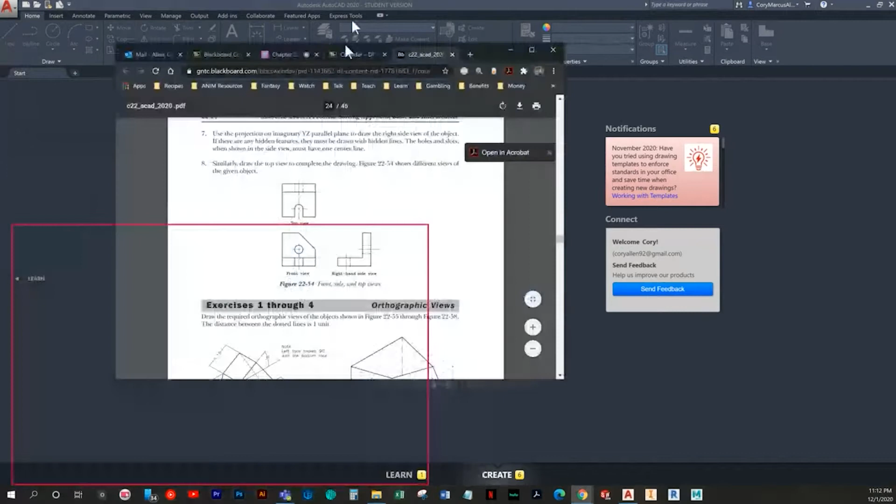We're just going to draw orthographic views for the assigned exercises, but we're going to make sure to draw them in a specific way. So when you're looking at a view such as this, you're going to have some indicated information it's not really saying.

It's easier to see on this one, but with the way this part is positioned, obviously you know that this face is going to be the top, so you're looking at it down onto that view. But what it's implying with the position it has is that this is going to be the front view, this face, so you would be looking at it from this direction. So obviously that means this would be your right side view, and you would be looking from this direction.

And that face over there from this direction is the left side view. You would look from this direction. And the same with the back and the bottom and so on.

So when you see it positioned like this, you have to make sure that you are drawing it with the intent of having it laid out the exact same way. So even though when you look at this, you would think that you would draw this face first, that's really not going to be the one that is indicative of the actual front view. That's going to be the right side view.

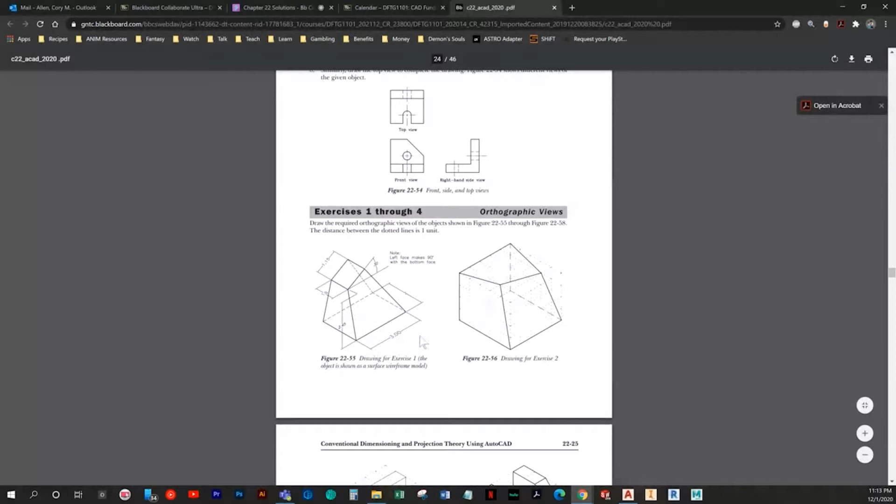So even though on this one, for instance, when we start, we'll draw this view first, it won't be our front. We'll have a right side and we'll project it over. I don't want to get too many details in there before we even get started, so we'll go ahead and jump in and get to drawing and see what we can make of it.

And it appears that they're all going to be on imperial units, so let's get started.

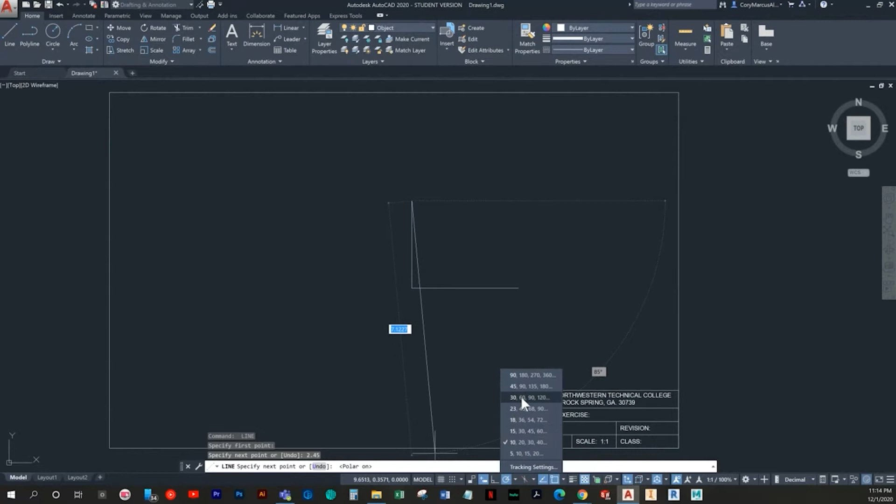Okay, so first and foremost, we'll do that right side view I mentioned, and it's 3 long and 2.45 tall, and then we're given an angle of 30, and it's a length of 1.15.

So I can go ahead and close that, and I'm going to switch back to ortho so that we can draw straight. And there's various different ways to go about producing the next view.

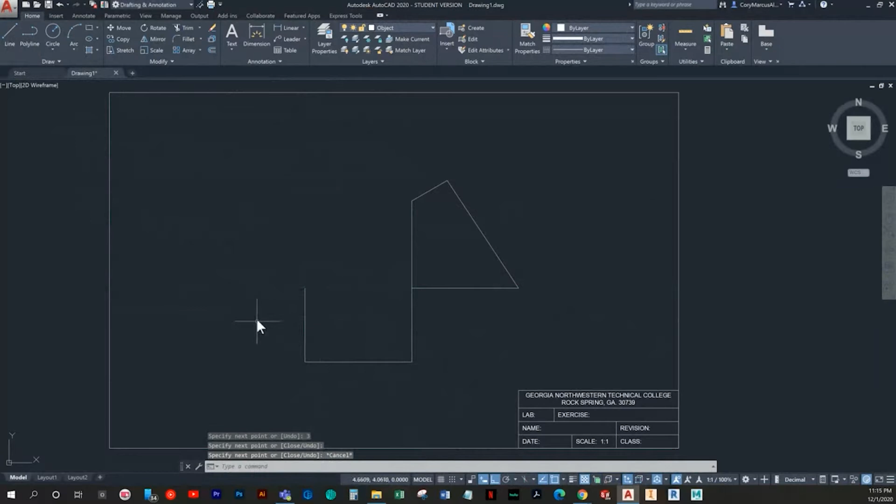A common method is to do an offset of 3, and that'd be your first edge. Another trick that I like to do is I'll draw just down some random number, do 3, and then draw back up and find exactly where the end is. So then I can draw whatever, and I can easily delete this portion out. That's what I'm actually going to do in this case.

And it doesn't specify how many views we need, so we'll just do front and right and see if I feel like we really need anything else. So the bottom is 2 wide, and then we've got these lines here.

And I'm going to draw a center line because our top is actually only going to be 1 wide. So I'll offset both directions.

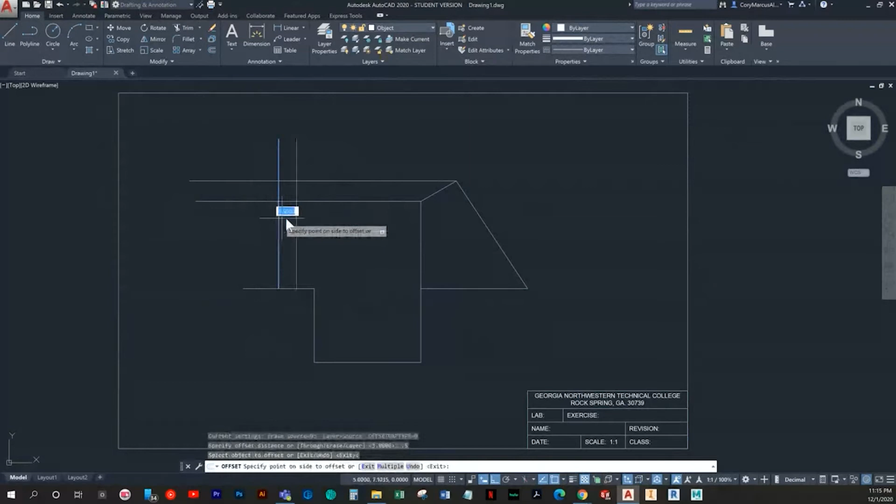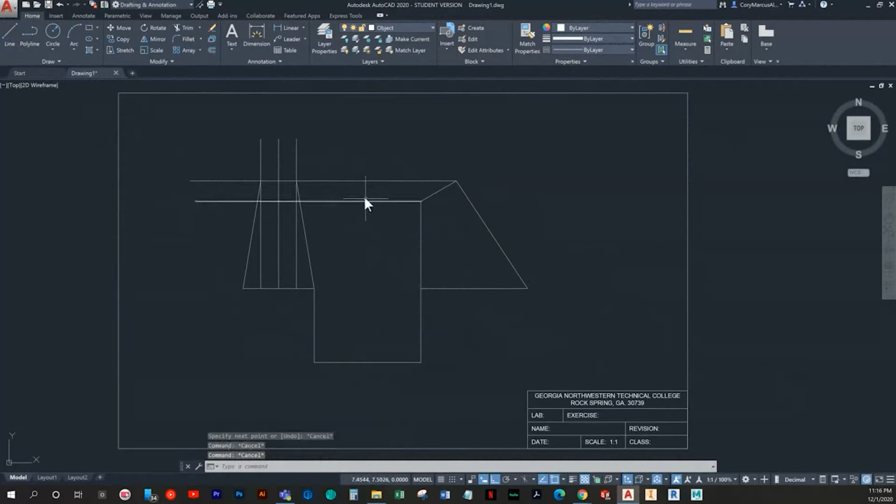And then we've got, and this may be hard to visualize, so I'll break it down. So like this edge here, we're going to draw first. I'll connect this edge piece that corresponds with here to the one that corresponds with here. And I'll do the same for this side. And just so it gets a little less convoluted, we're going to delete out some of the extra stuff now.

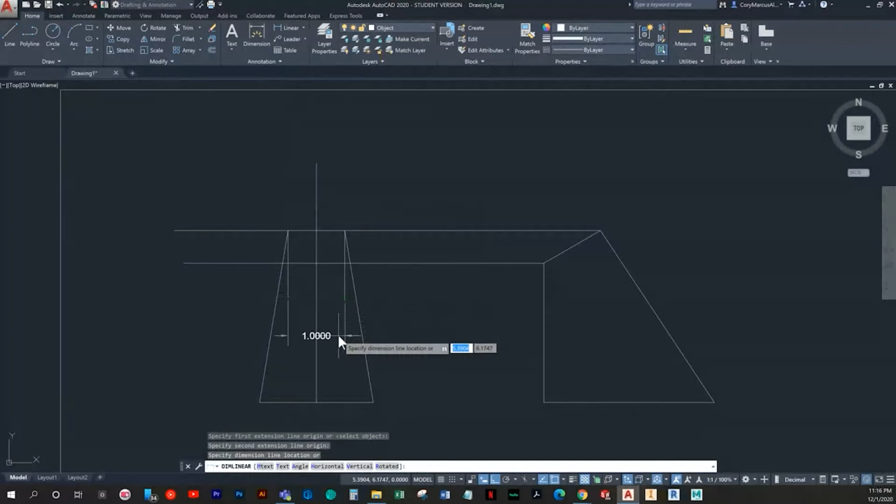And then we're going to draw our line straight down here, because obviously, it's going to be 1.0 all the way across. It's a perfect square or rectangle in this case.

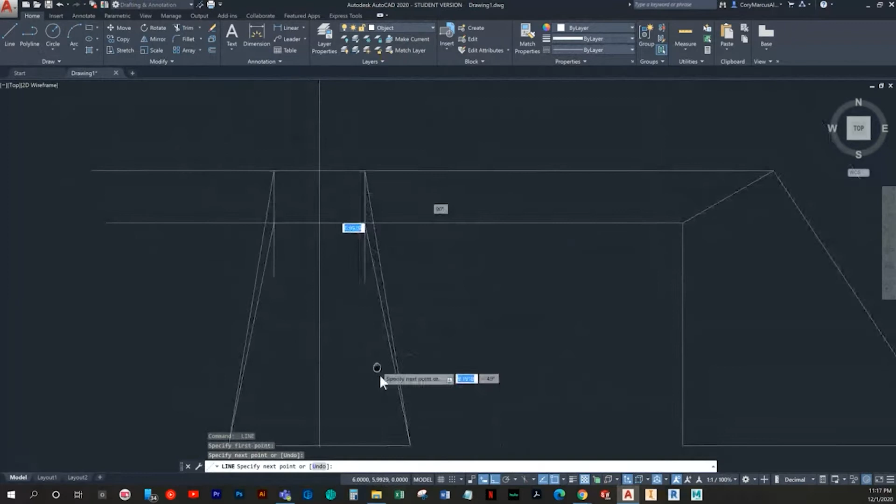So then we can draw our other lines, which would be this edge here connecting to the intersection. And it's always a good practice to zoom in and make sure that you've landed the right connection, of course.

And it may seem small here for this rectangle, but that's actually correct because obviously, as you can see, it's only that far over. So I'm just going to trim out the little extras here.

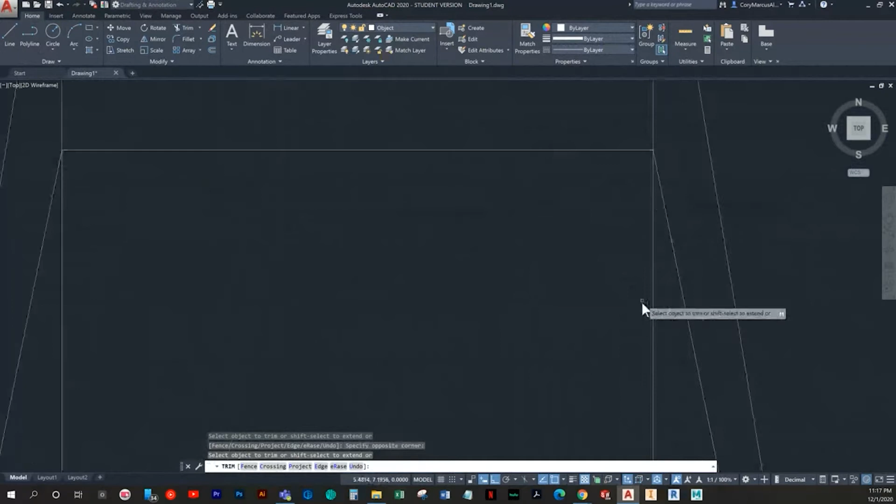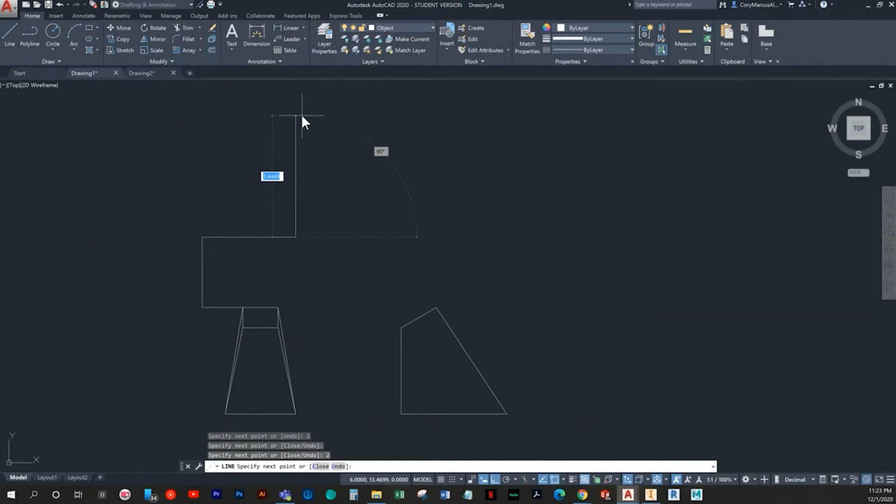You know what? Let's go ahead and do a front view, or top view actually. So in the same vein, we're going to start from here. I'll just draw randomly out, then up 2, and then back over to where that intersects at this given point. And then I'm going to draw up, which this is going to be the width of 3.

Okay, so now I can delete off this little projection portion. And I drew that from the wrong edge. Okay, so now we've got our full boundary of the top view.

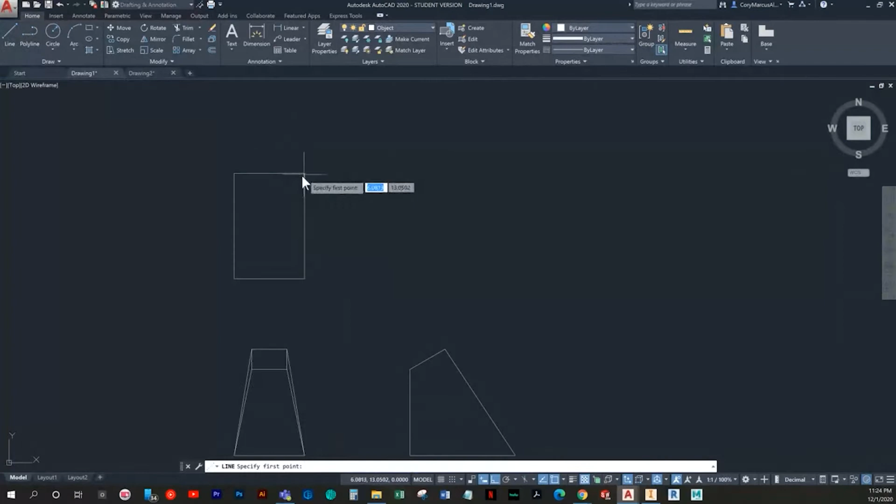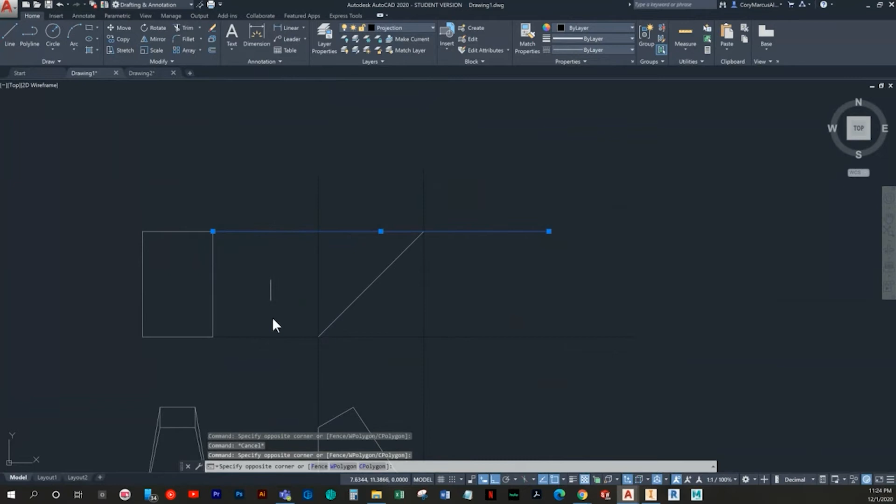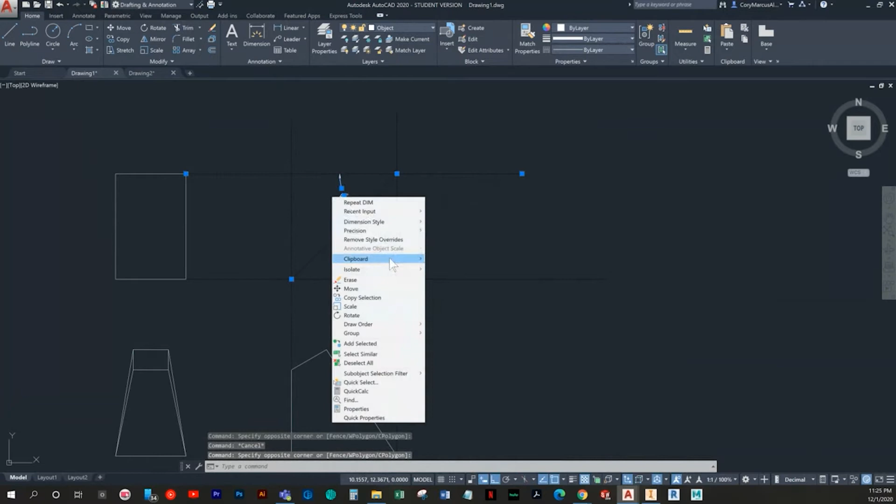Okay, so now is a great time to do a miter line. In order to be able to project some of this information from this other view, it's often easier to do a miter line. So basically what you do is you draw an object that goes from the furthest extent of the part, like this is the absolute furthest distance on this end, and same here. And obviously because this part corresponds, this width matches this width, you end up having this perfect square, and then you can draw a line in that square, which is called the miter line. And if you were to go and measure it, you're going to get a perfect 45 degrees. I mean, even if you change the precision to maximum, it's 45.

So the perk of this is you can actually translate data across that axis, if you will. It's just a point of reflection. So what I can do is draw this edge here, and it locates it in that view. So I'm going to then go ahead and draw in what is the rest of that rectangle using the other view.

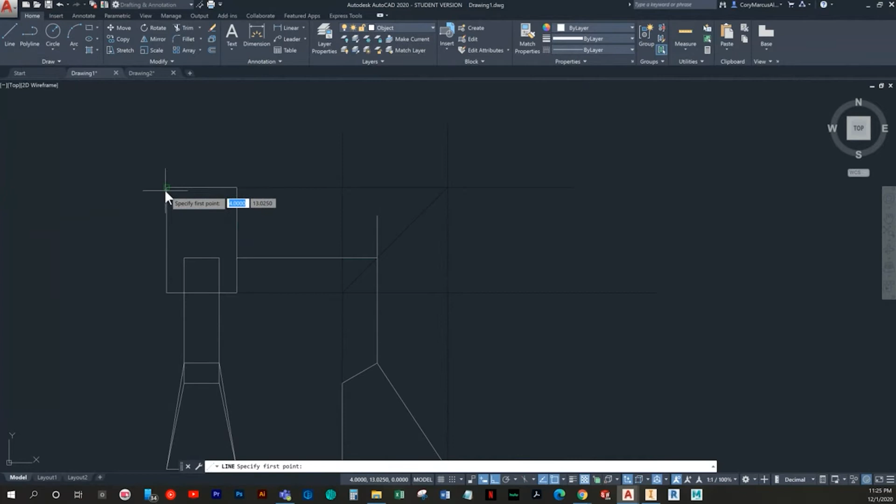And then all we have to do is connect our edges. So we know that this vertex touches this one over here. So I can basically use some reasoning to match up what's left. And then I just need to trim away the excess, and I can delete all this other stuff. And just like that, we made a pretty quick other view. So that's going to be it for this one.

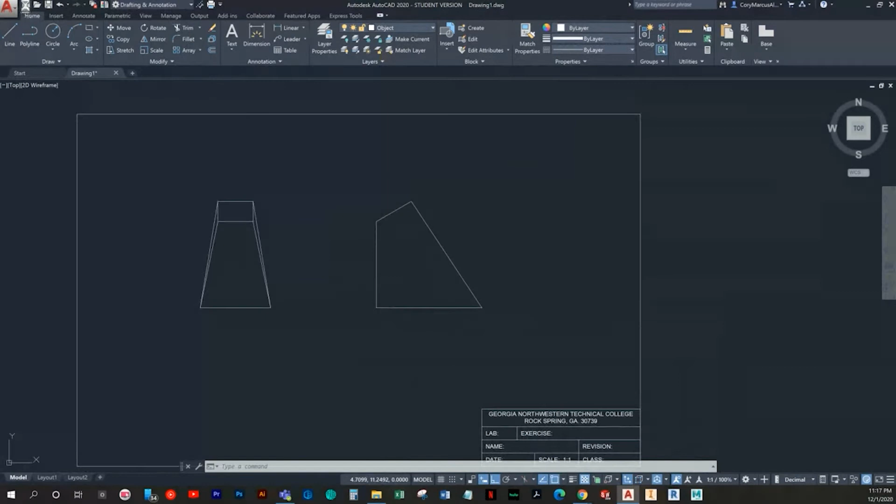So we'll go ahead and jump into exercise 2.

Now this one we are going to draw our front view first. And it actually gives our units as 1, so I'm going to turn the grid back on. That's pretty cool. Okay, so it's 5 long on the bottom, and then 4 tall. And this is where it gets kind of goofy and it's hard to tell, but basically when you're looking at this one, it stays within those cube boundaries.

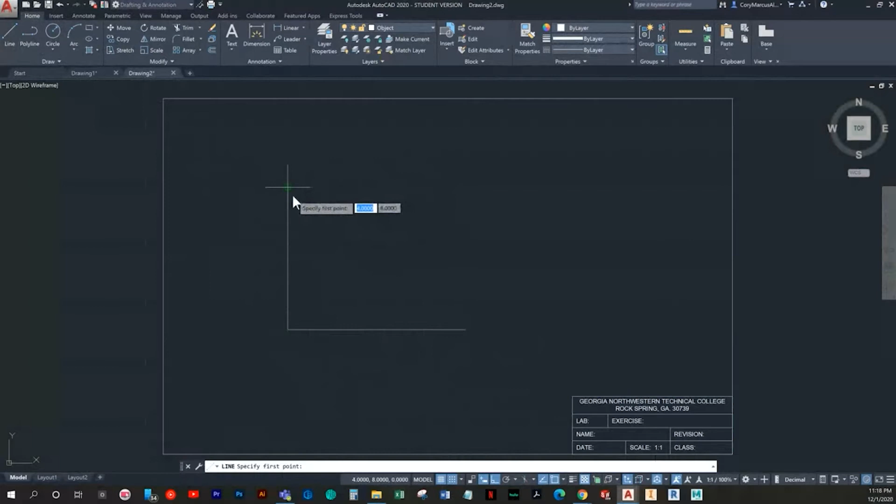So if it's always on a dotted line. So if it looks like when you're looking at this view that it's actually like randomly up here, it's not. It's just further deep into the actual object. It's still on this edge here, but it's only 1, 2, 3, 4 far. And then it just connects down here, and that's our front face. But obviously there's another face in the back that you have to do as well.

And it's the same on this edge in the back, so we don't have to worry about that part of the back face, but we do have to draw the other face. Okay, so it starts here as well, and then it is also this top face, but it is only, let's see, 1, 2, 3.

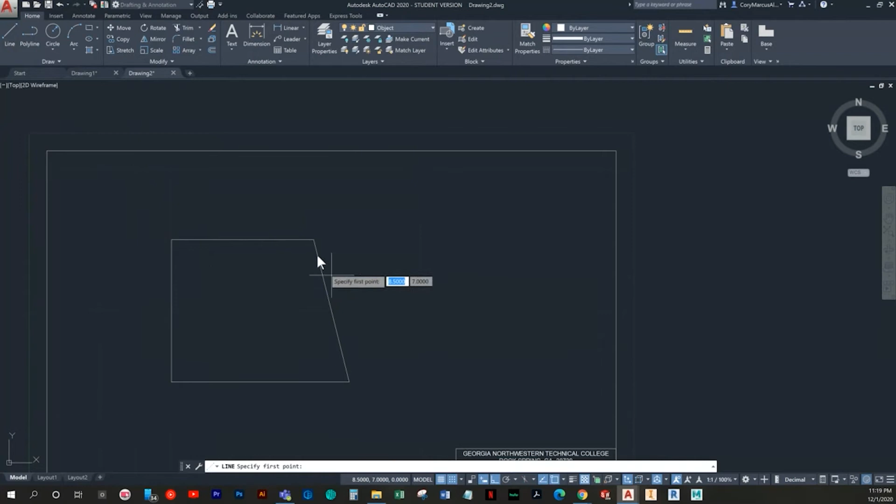Actually, it's kind of hard to tell. Let me look a little closer here. Ah, I drew the wrong one first, I think, actually. 1, 2, 3. Yeah, okay. My bad. So the front face actually was 3 over earlier.

Let me turn off my snap for a minute so that it doesn't keep snapping to it. Yeah, so looking back at that first one, it was 3 units over, and I miscounted. So this is the rear edge that you're actually seeing behind it.

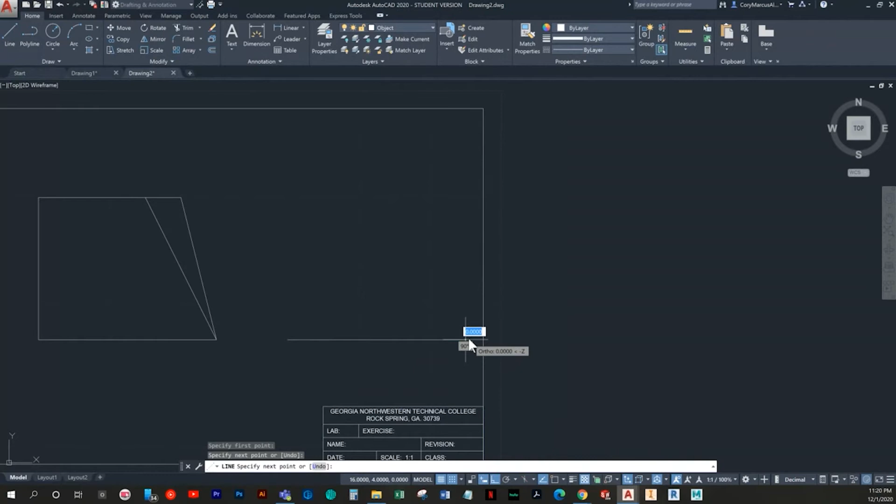So then we can go ahead and jump over to our side view. And we'll start 2 over from it. And it's 5 wide. And naturally it's the same height as the other one by default. So I'm just going to go ahead and draw that in. So then from there, we know that the front face earlier was from this point, and it connected down here.

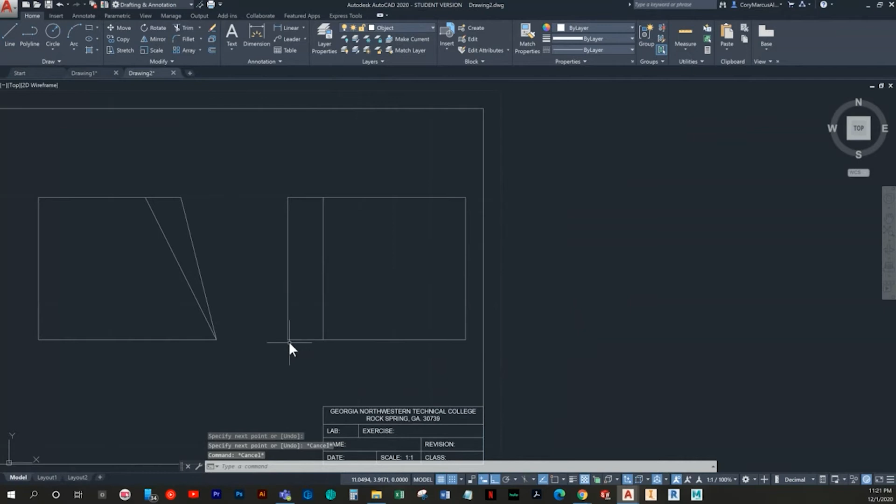I don't know why I drew it there. It was down here. So it's actually the same on the back end as well. I see the problem, I had ortho on. So, ironically, it ends up looking pretty basic.

Okay, let's go ahead and do a top view on this one. This one's going to be pretty complicated, so I feel like it really does help. We'll probably just do top views on each of these as well. I think first I'm going to move this down a little bit so we can have a nice grid to work with.

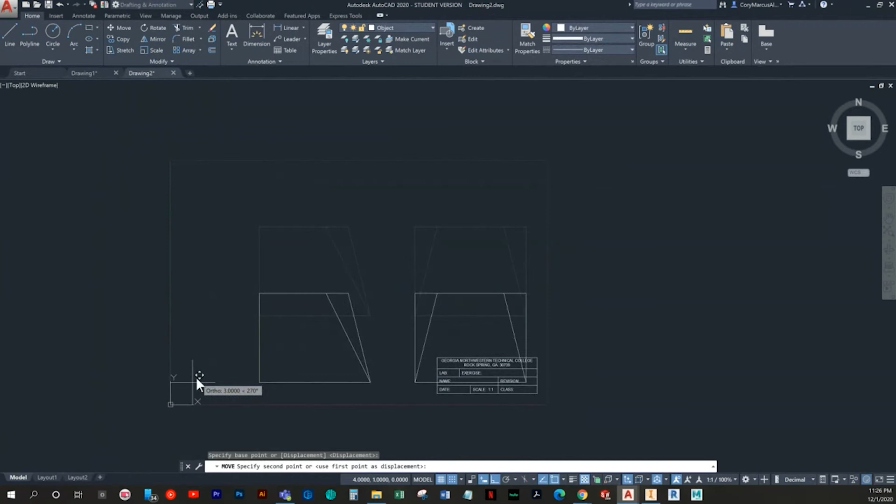And for the sake of cleaning all of this out to have more room, I will draw here. Okay, so it's 5 tall and 5 wide. So once we have this box, I'll go ahead and start to trim away at it.

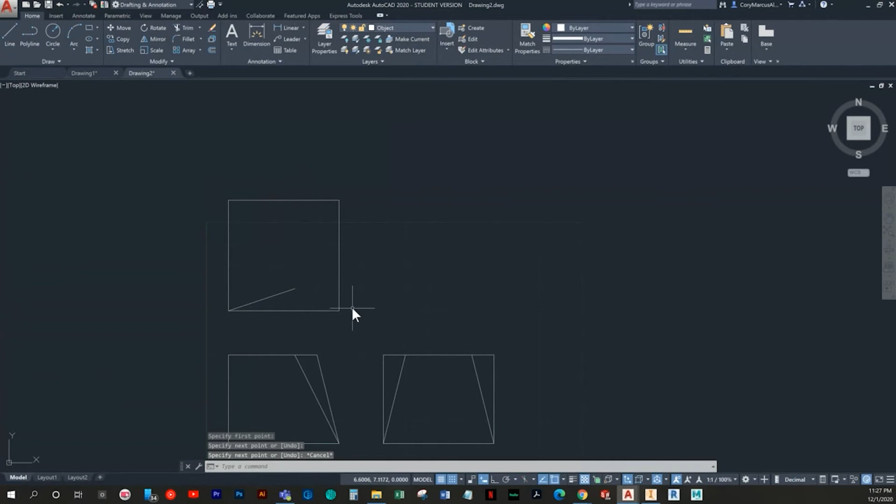But obviously on our top view, it does have a bottom face that is a perfect rectangle. So we have our first line, which was the top edge in our front view, and it comes over 3, and it goes back 1. Then this edge here went from here to that same edge, and then this back edge was over 4 and down 1.

So they were pretty much just connecting the dots to make it look right, but in a nutshell, you end up with that profile like this. And yeah, that's your top view. It's actually all that you have to do on that one. It's more straightforward than it seems.

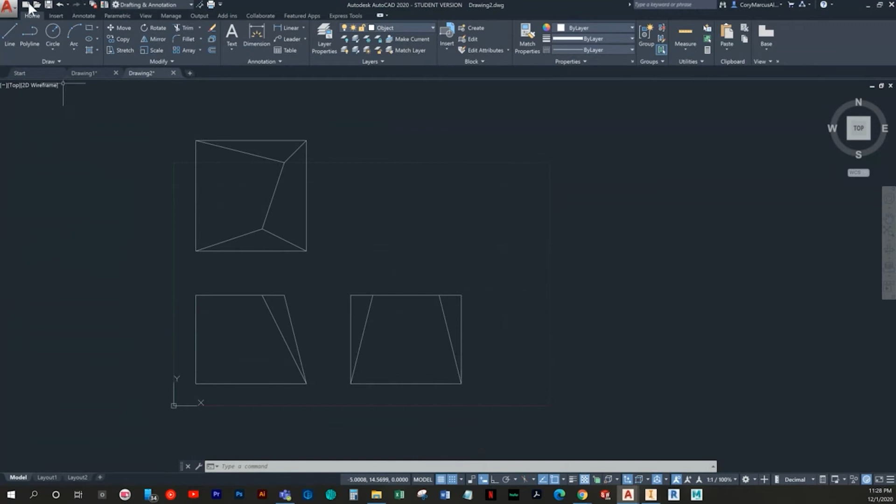So next we'll do exercise 3. And I'm going to start it a little further down. I think this guy's pretty big too. Okay, so it's 2 over, 1 up.

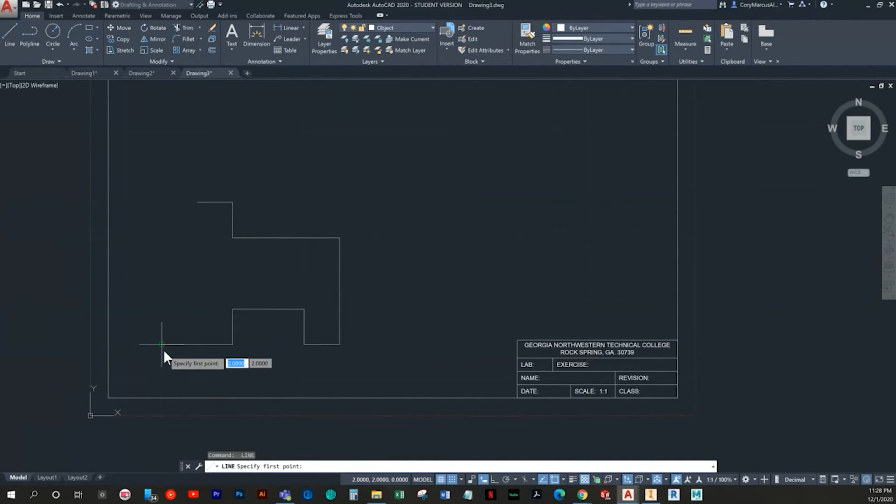Oh, I wasn't paying attention. 1 up, 2 over, 1 down, 1 over, up 3, over 3, up 1, over 1, and then I'm going to stop there. I'll go up my 2 and then connect the dot.

Okay, so I'm going to leave out this part. Well, I'll go ahead and draw it and we'll talk about it. But basically, there's going to be a hidden line here as well. The reason being is because there's that gap which comes in 1 down, and you'll be able to see that edge in this view.

And we could have projected it, but just for the sake of getting this done, I suppose we won't bother with it for now.

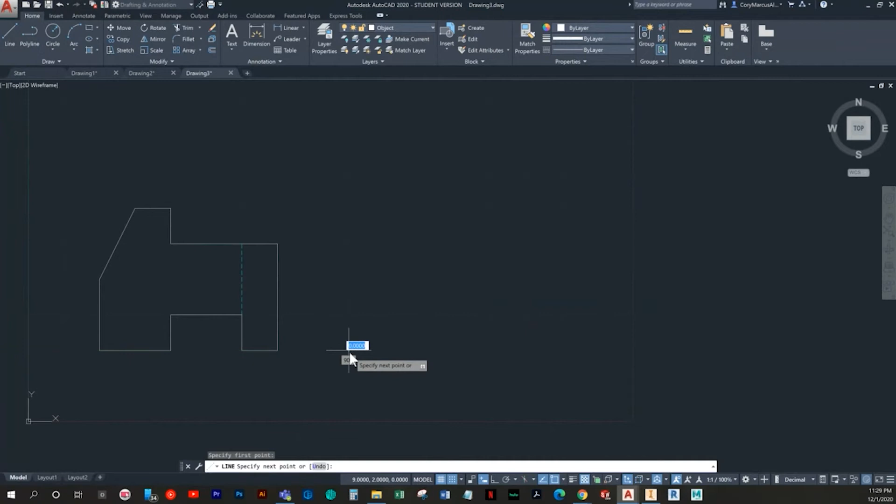Alright, so now we'll do the other view, the right side view, and it's going to be 5 wide. And let's see, that first portion is going to be 3 tall, but really there's actually a 4th, so let's extend that.

We'll have an edge at the 3 mark. Wouldn't you know, snap gets in the way sometimes. Okay, so we'll have a shape roughly like this. But then there's some information that we'll have to add in.

So like we've got that little cutout I was talking about earlier. It's going to run up to the end of that 3 height. And then we've also got this, which you could project over, but in this case, we can just draw a horizontal line and know it's there.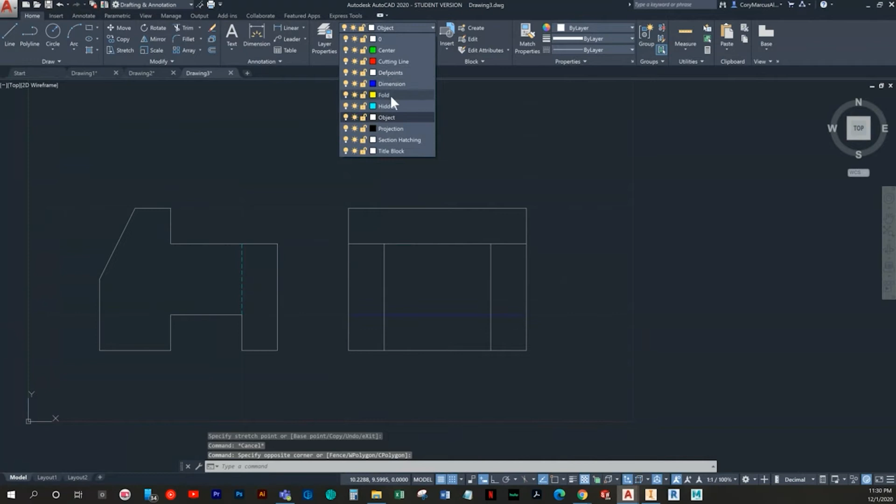Okay, so what we have is our cut through on the bottom, and we have this little section here. You may wonder why is it that you have this edge that goes throughout? It's because you've got the edge for the cutout, but you also do have that edge on the back where this vertex is, so you would still see it. And that's pretty much going to be it for that view.

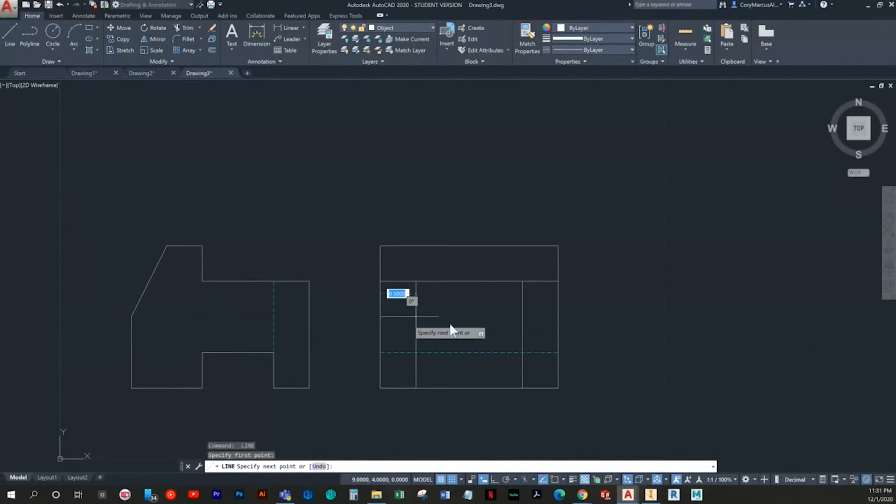There is one thing I missed though, and it's this. So like obviously we need a line that goes through here. I knew I was forgetting something. I'd pull up my key and see.

One other thing I missed as well is this cutout portion. If you're looking at the ISO view that you're given, the cut goes all the way to this gap. So actually, you're going to end up with this object line here. So if you want to do a break at point and break this part and make it object, you actually would see that groove here, unlike the rest of it.

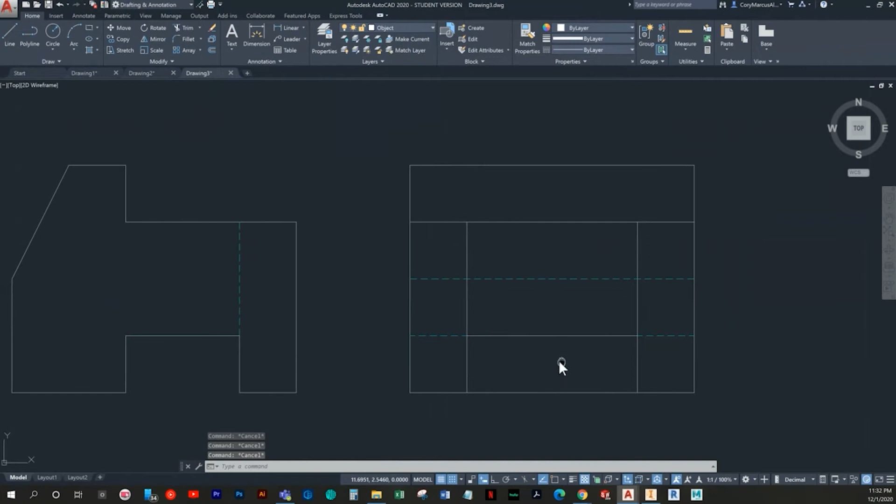So, anyhow, now we'll do a top view. And it's going to be 5 as well.

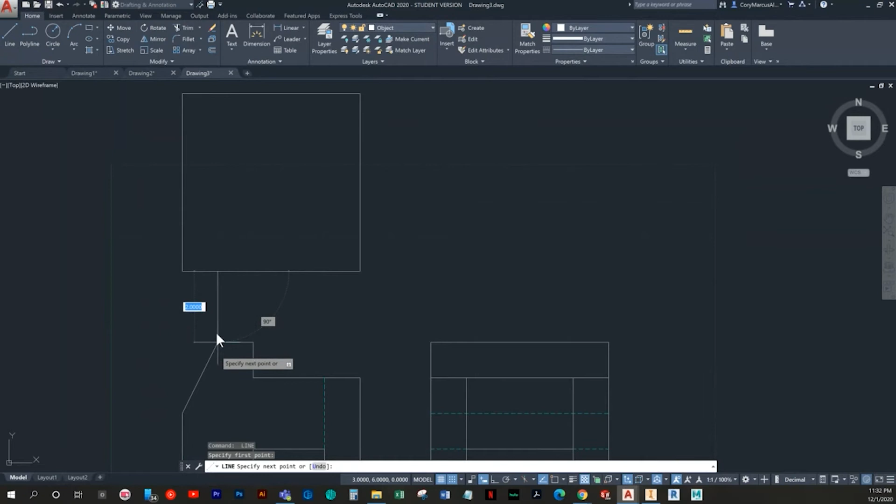And we're going to match this edge here. We'll match this one here. We're going to match that groove. We'll have to play with it a little bit because you've got this width here, so it'll only go this far.

So now we'll do another split, break at point. And now we'll change these to be hidden, because we'll see that cut underneath only here. The rest of it you won't really be able to see because object lines will override it.

So the last thing to do is just trim out our little cut back here. Alright, so that's going to be that for this one. So next we have exercise 4.

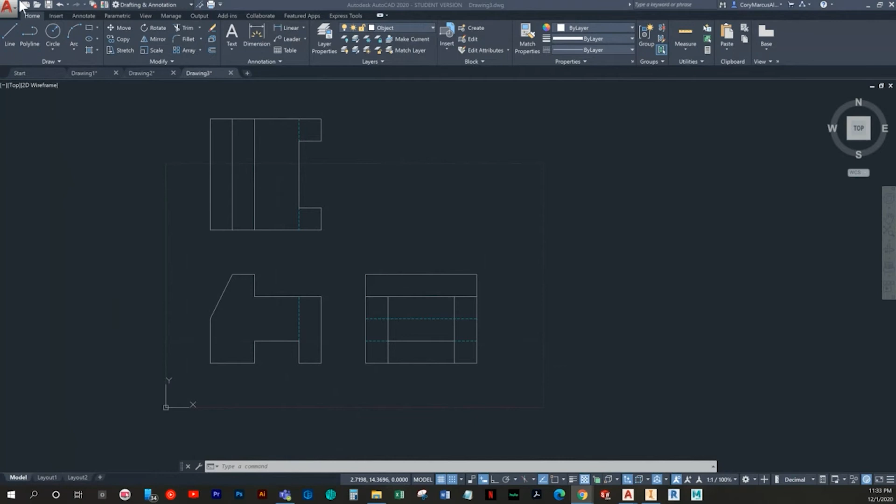Even though this is one of the ones where you want to draw one view, you're supposed to draw another one because they want it to be your front view. I think the reason they do that is mostly they're trying to make you think creatively about what edges exist, but they don't want to overwhelm you at the same time.

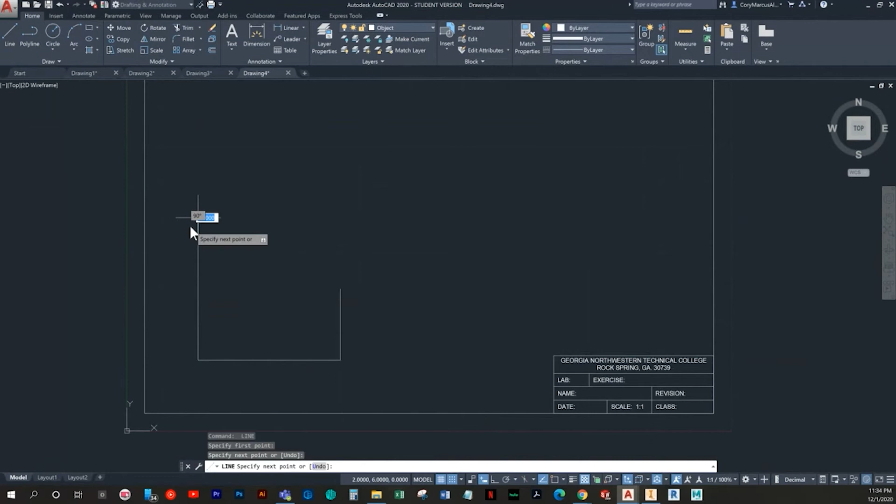So anywho, we have up 2 on the right, up 4 on the left, over 2, and then we're connecting the dot. So then we have this edge, and actually that's going to be it for this view.

So then we will have 1, 2, 3, 4, a 5 wide side view. And overall, of course, it'll share the same overall height.

And then we're pretty much just matching this to this one. So I guess I could go ahead and draw a line here. But really, this edge needs to go to here. Go over 2, and I'll do the same shape again.

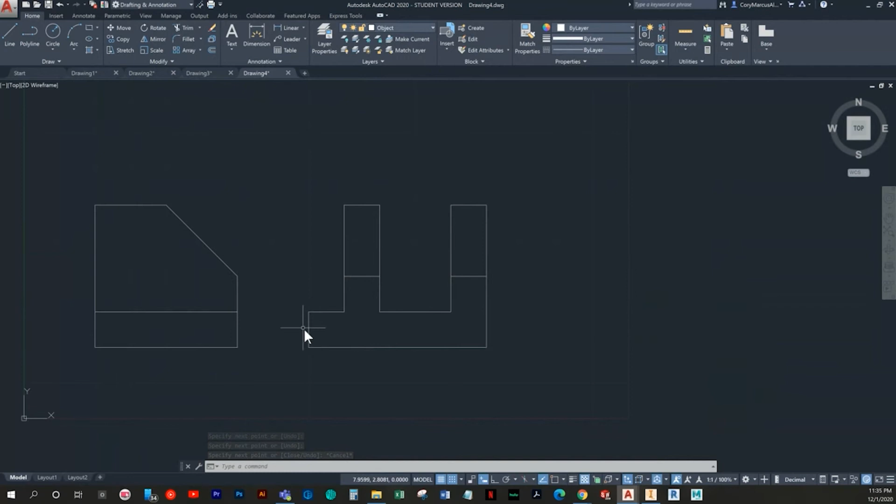Yeah, okay, so basically you're going to have your edges matching, there's no hidden lines, and then we can do our top view. And I don't feel like we need one, but that's okay.

1, 2, 3, 4, 5. It's going to be 5 tall. It's always good to have more rather than less. And it's good practice to do all 3 views, because a lot of times it may be required or whatever, really.

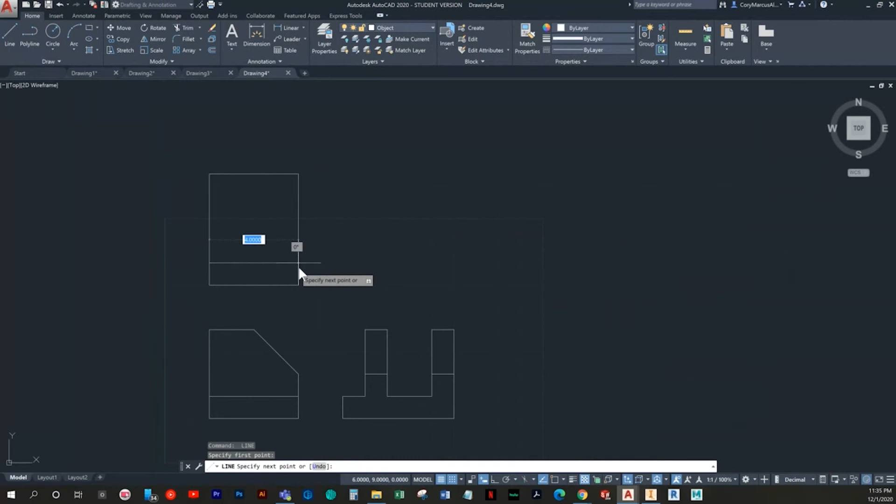Okay, so we have one line here to match this little portion here. And then we're going to have the same thing, except it will have this edge here where it transitions in length.

And then we'll go over 2 to the back and have the same thing. And yeah, that'll be all for this one. So then we'll jump over to exercise 5.

Okay, so now we're starting to get into kind of a little harder section. They're not just cookie cutter grid items, but they're still pretty basic, really.

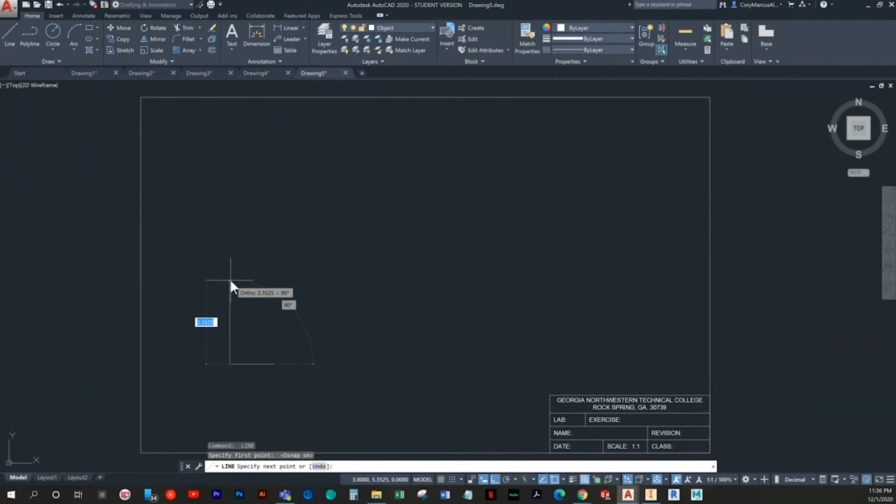So we have one that's 1.25, and let's see, are we given a height? Yes, okay, but it doesn't give us that one. Although it's pretty easy to do the math, we'll give the drawing the values that it has only. So we'll go up 1, over 0.5, down 0.5, zoom in a little bit.

And then let's see, we'll just go ahead and draw what we have and trim it. And then we're given this little V cut, the 0.5 value. We can just go ahead and...

Offset and draw it in. We could have drawn it from the other view and projected it, but it's pretty straightforward, so we can go ahead and put it in and not worry too much about it.

And since this one's so small, I'm only going to do 1, but we'll go ahead and start the top view, or the right side view. And the overall width is 1.

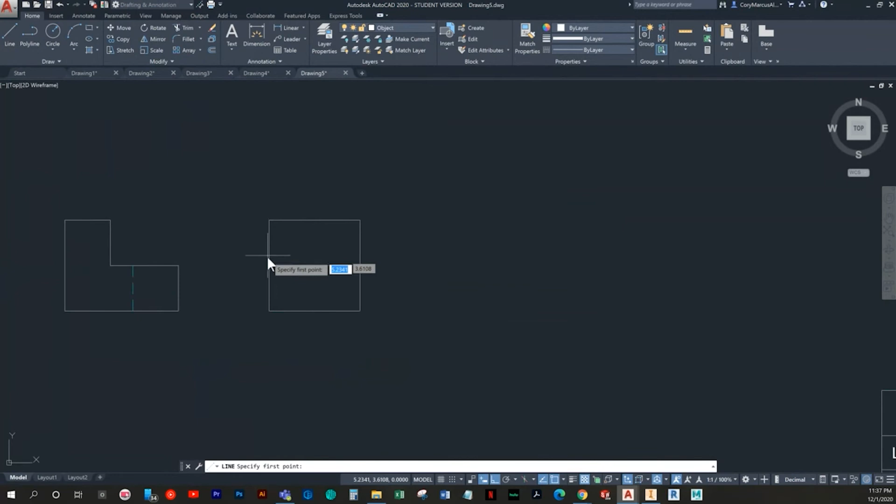Sorry about that. Okay, so then we can project our edge over. And then we are given a width of 0.5, so we'll just offset both ways, half of that. And that'll give us our V-cut shape.

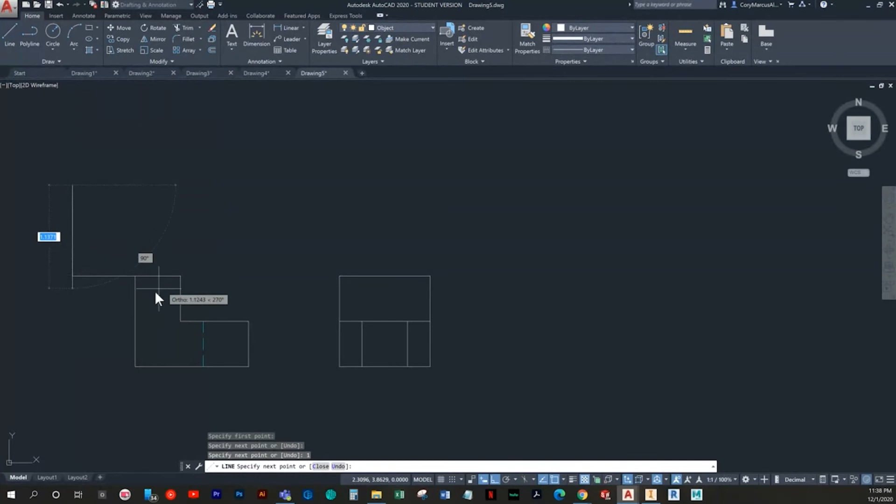We'll draw a top view so we can actually see that V-cut. Come on, you.

Alright, so I guess if you wanted, and you don't want to trim all the time, you could be more precise and do a lot of projection like that, but I tend to just slap in values and call it a day for the most part.

Alright, so now, since I had this edge, I can actually just use it. And, well, heck, if I want, how about this? Let's do it this way. So we'll do our miter line.

And if you're wondering how quick I draw these, it's because I'm hitting escape space. If you hit those rapidly, you can end the command and restart it. So all I'm doing is just spamming clicking in order to get this drawn quicker.

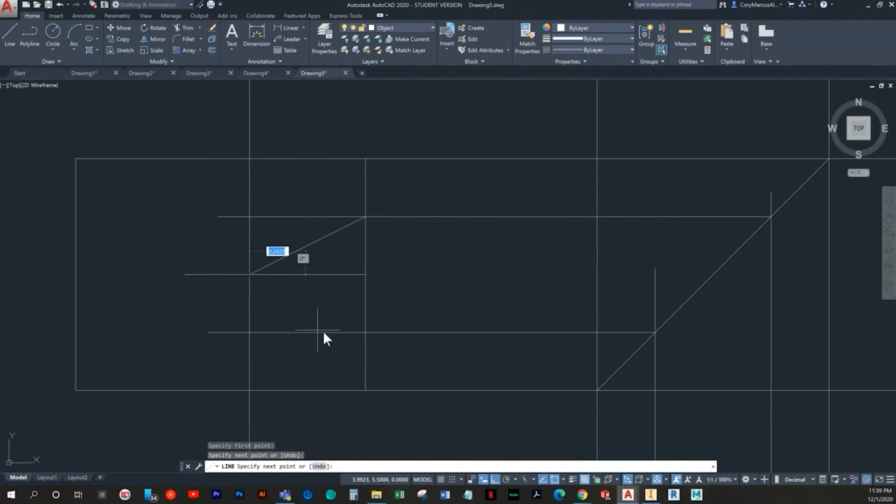Which this one I didn't make far enough. But okay, so now that I've got that, I have one edge drawn, and unfortunately I kind of need a midpoint, so I'm going to add in that little center line. You can ignore all of this right here, this is for our V cut. So I'm drawing from the first edge to the center of it and then back to the other edge. Then I can delete all this extra hoopla and make this a little more tidy.

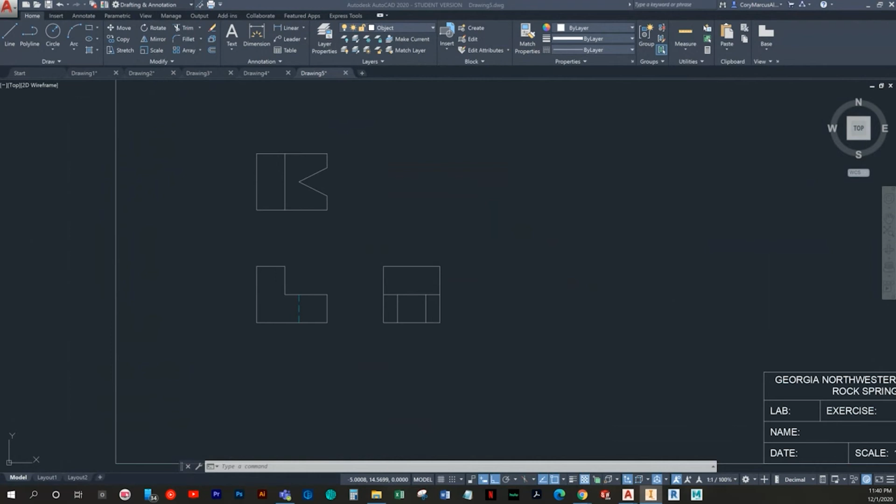Okay, so now I can go ahead and draw in this portion. And now it's starting to look like something. Let me double check the key, but I believe that's it for this one. No, I am missing one thing. I take that back. You may have already noticed at this point, but basically I am missing this edge. I had it drawn and I deleted it out earlier. But obviously you're still going to see it. That's why you see it here, and that's the edge there.

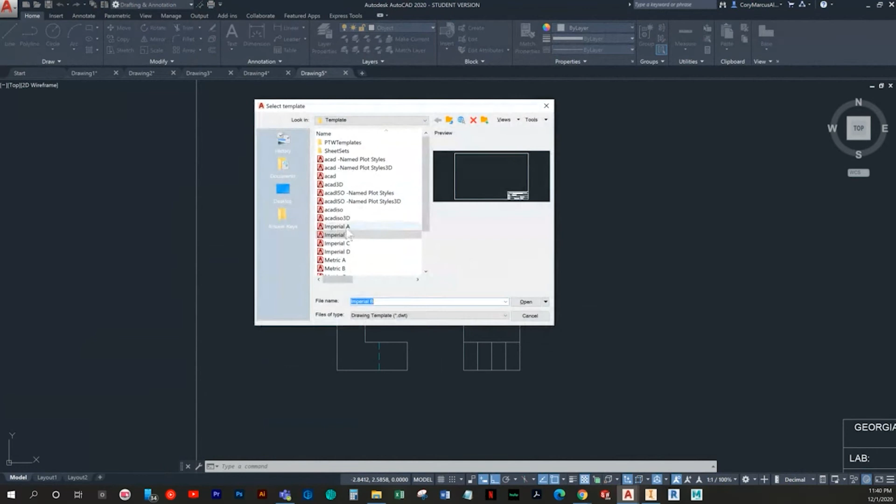Anyway, we'll go ahead and hop on to exercise 6. And this one's pretty chill. So it's 2.5. Oh, that was bad. Undo.

Okay, put ortho on. 2.5, and then it's 1 tall. And then, for the sake of trying to use the values it's given us, it's overall 2, over 1, down 1, connect the dot.

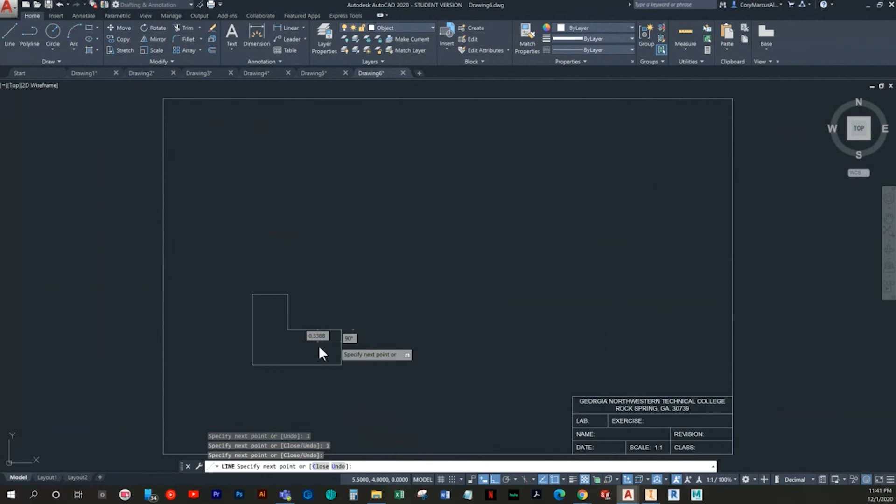And then we can just grab this line and pull it to its end. And that's actually it for that view.

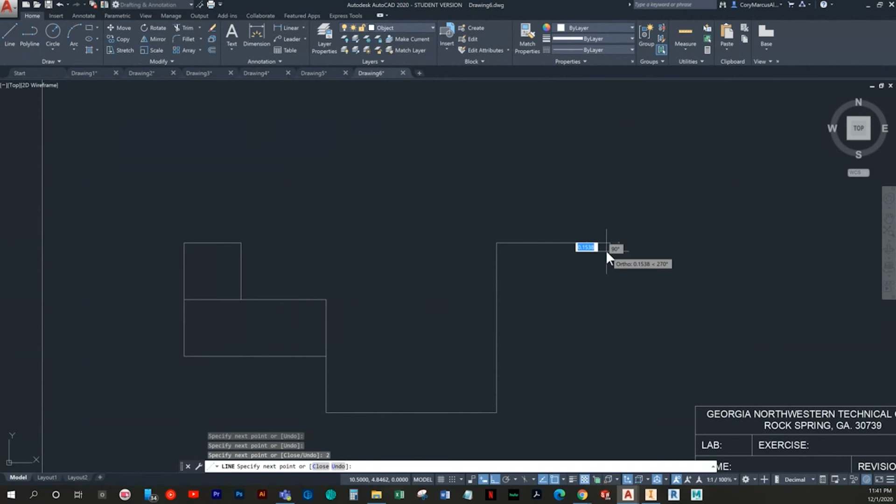And that's kind of short, so I'm going to do it 2 from the other one. There we go. All right, and I'm just going to match the heights here. And then it has the overall width of 2.

And I can just delete off our projection line. Trim the excess. And this one's actually not too bad. It's just drawing a line and offsetting a line, and you pretty much got it all.

So I've offsetted 1 over, so then I'm just connecting the dots to get our slant. I need to trim actually. Sorry about that. So yeah, that's it for the side view.

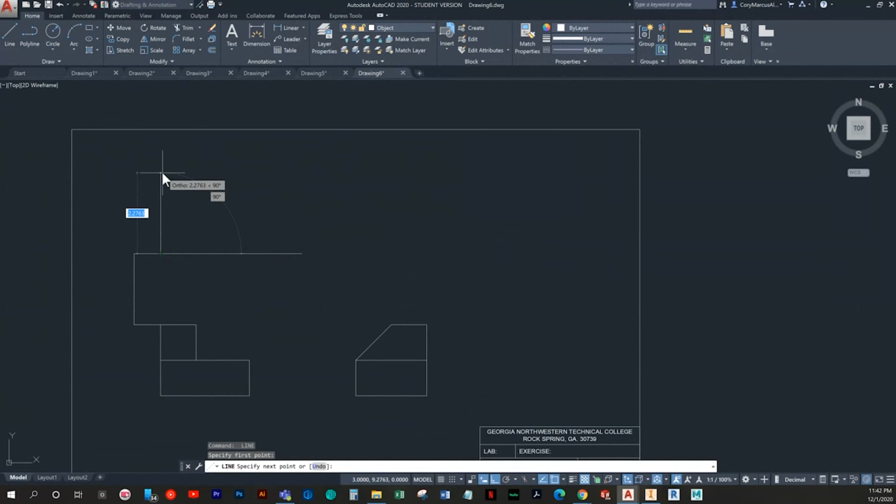And we'll do the same thing, go up 2, get that edge aligned. And let's see, it's 2 here as well, by 2.5, and I guess I can go ahead and top it in 2.

All right, so then you just project this edge. And we'll do a miter line again. Why not, you know? It's so effective. If only I would have known it was in the middle.

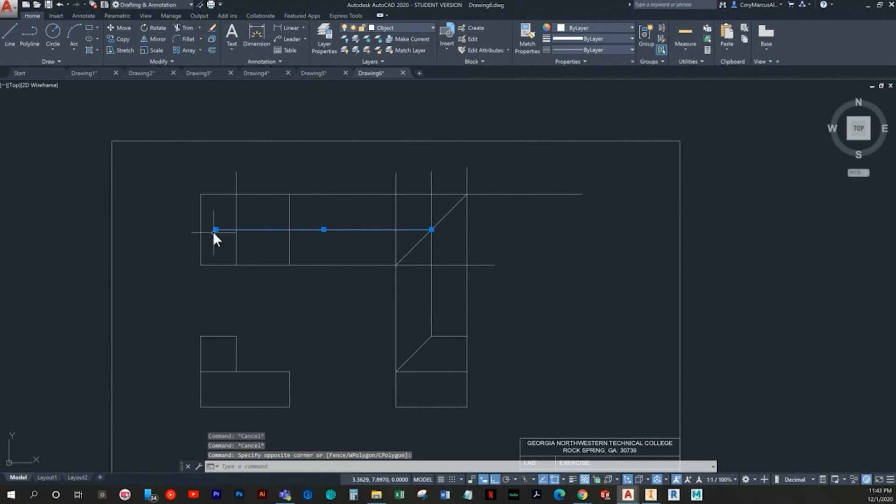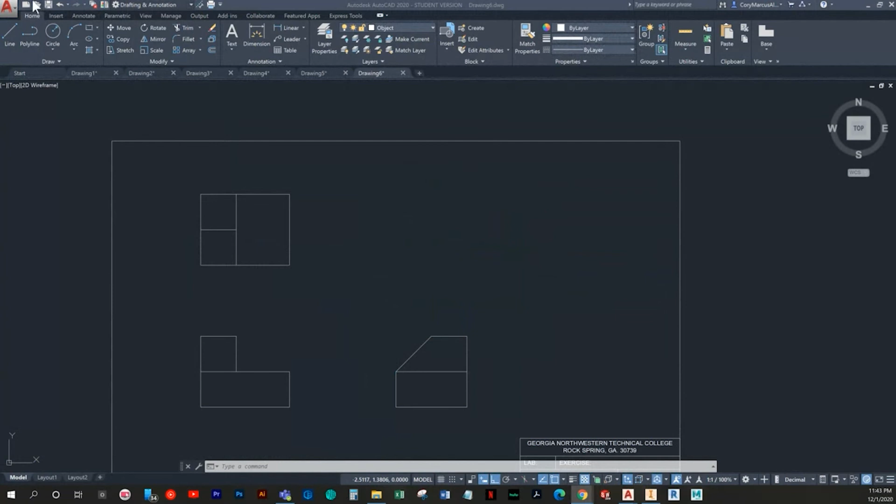All right, so that's going to be it for this one. Let's go ahead and take a look at exercise 7. Now it's got a little more to it. These last 2 are at least somewhat more difficult anyway. I think this one's probably the hardest of that group.

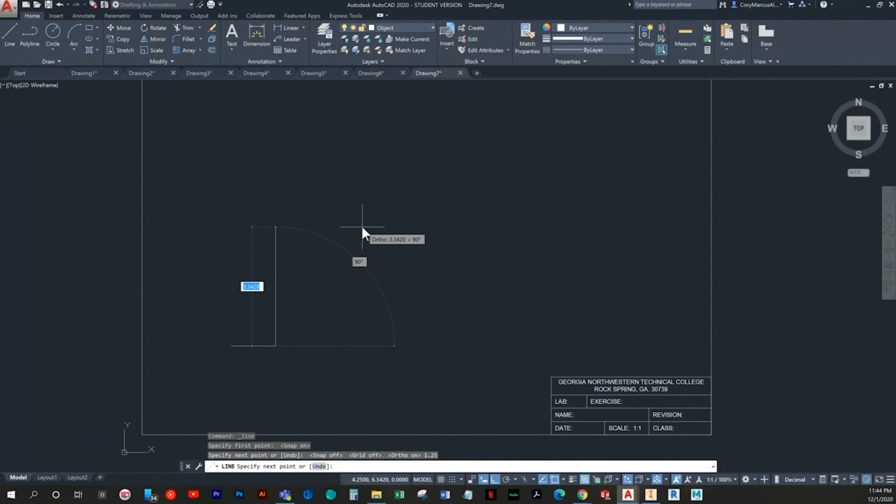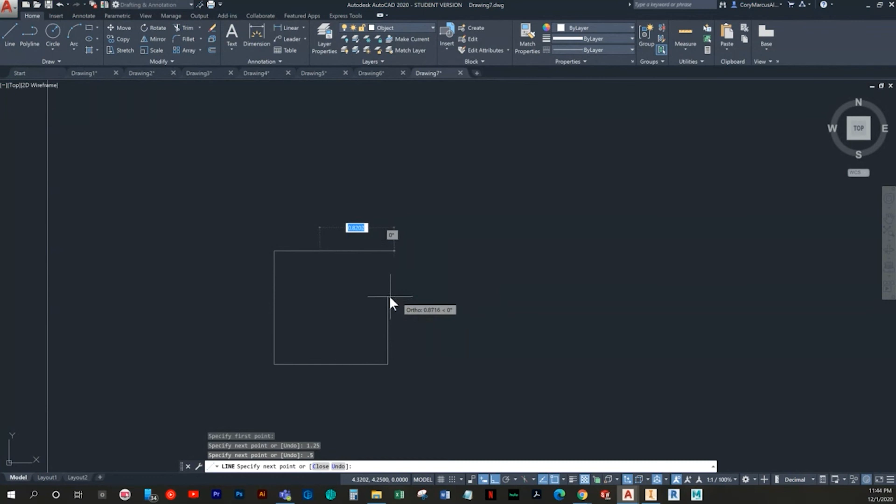All right, so it's 1.25 wide. And then it makes us do a little bit of math here, but basically it's 0.25 plus 0.5, which is 0.75, and apparently it's really tiny, but it's 1.25 tall, and then 0.5 along that edge, and then we just connect the dot.

Now I could go ahead and draw this, well, you know what, I might as well. I was gonna wait, but this one's pretty straightforward too. So from the bottom edge, it gives us this 0.25 value. And then obviously from here, it was just a straight edge. So you end up with this profile like this, and it's obviously not visible through that face. So it's actually going to be a hidden line.

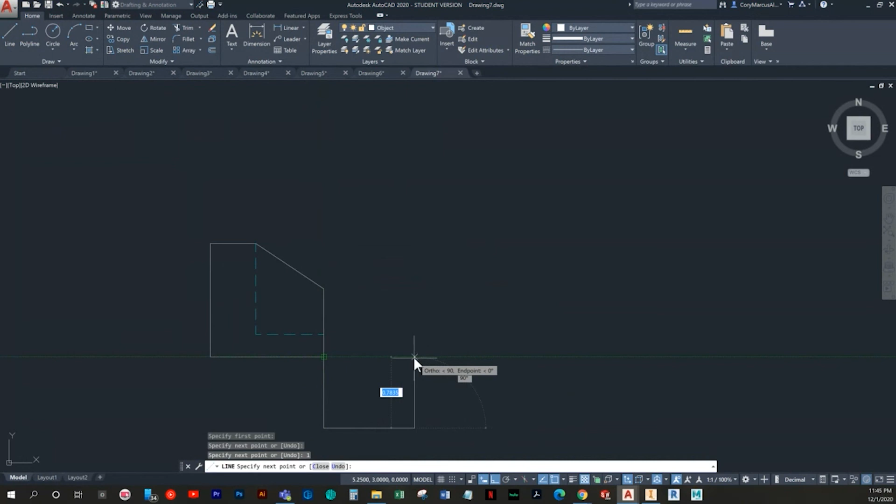So then we will have a width of 1.5.

You may notice I project different ways, but as long as you're keeping things aligned, you'll find what you're comfortable with.

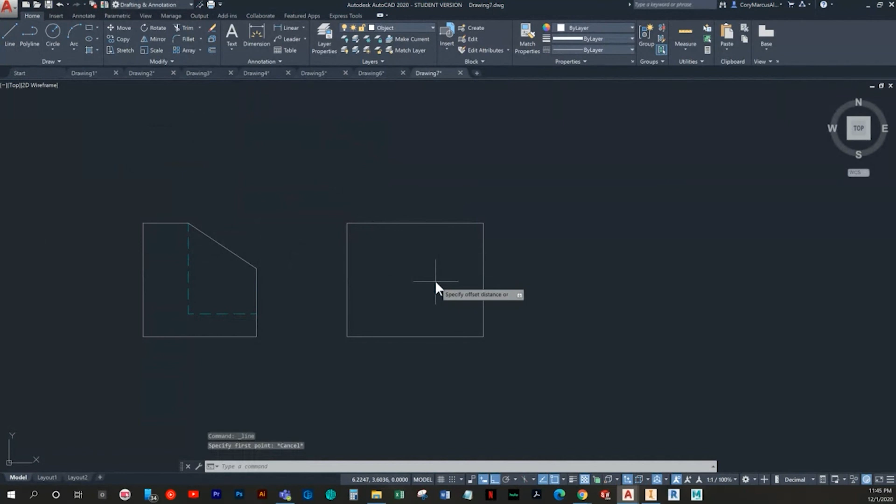The sides are 0.25 over as well. The reason being is you have 1.5, and you subtract the 1 from it, then divide that by 2 since you have 2 spaces. So that leaves you with 0.25 there. And the bottom is also 0.25.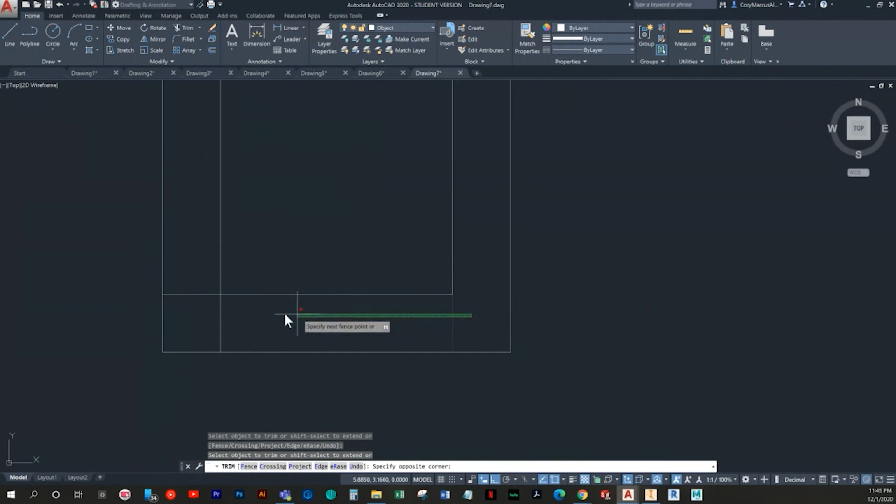I could have projected it, but since we already have that value, I'm going to offset it up as well. We can trim off the little extra portion to give us this C shape.

So then we need to add in this edge here. But obviously that edge doesn't exist in the middle where there's a gap. So that's going to be really it for that view.

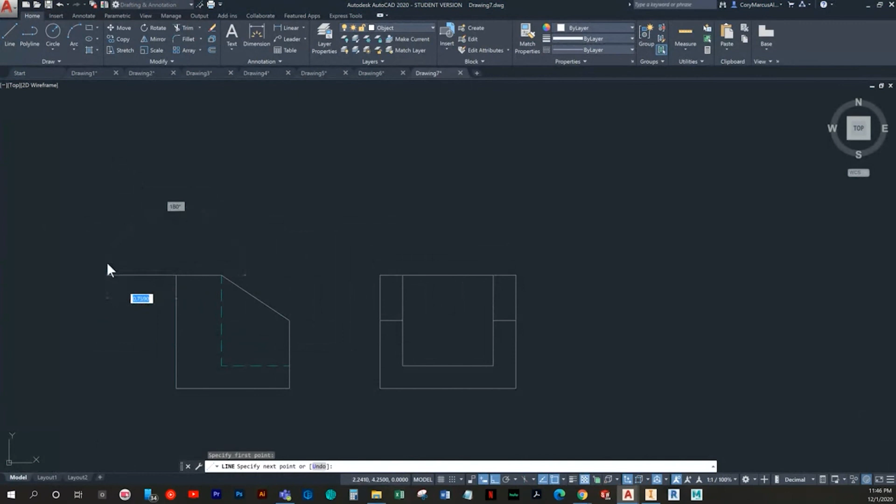So we'll go ahead and do this one, and make it match that width. And it's an overall of 1.5.

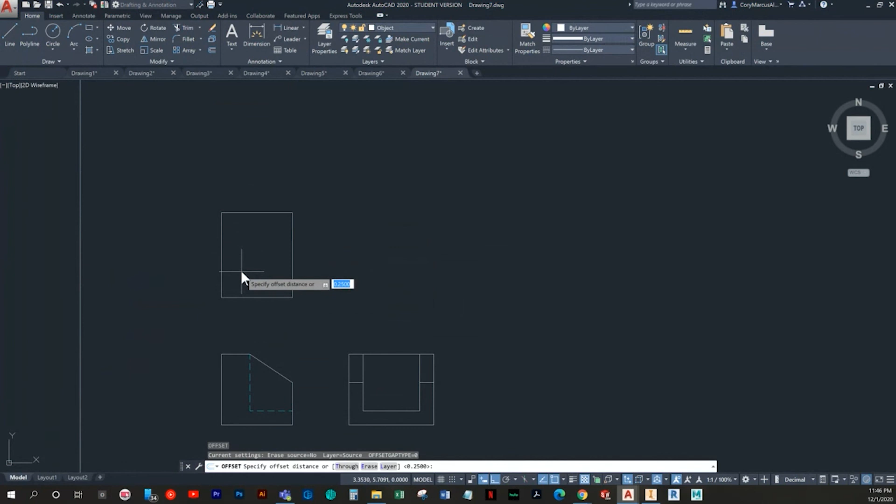And this time we won't worry with projection. I don't really see a need to on this one, so we'll just slap in our 0.25s from here. And then we had an offset of 0.5 for here.

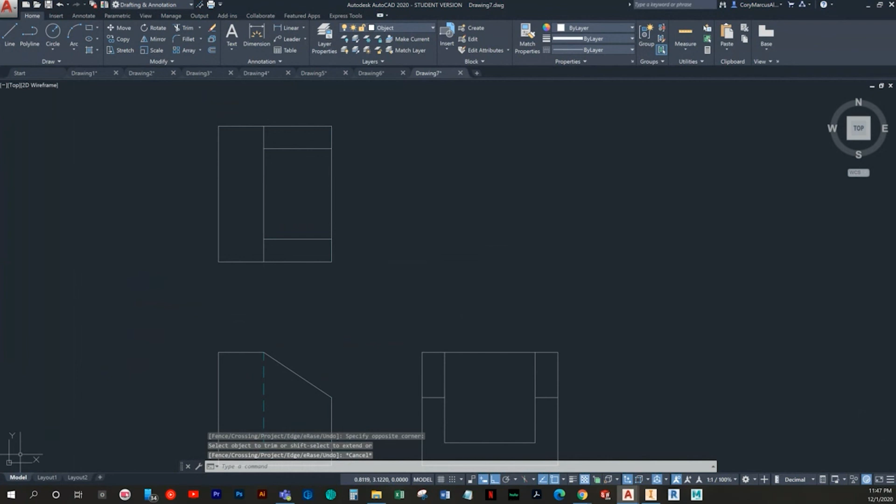Let me think, am I missing anything? No, actually. So that's going to be exercise 7. So let's go ahead and do the last one, exercise 8.

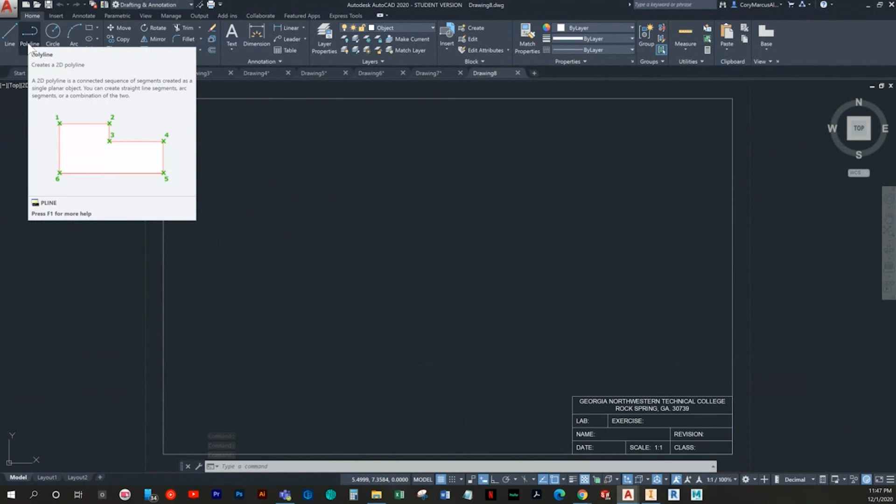This one's not really as bad as you would think, honestly. Looking at it, you probably think, how do I even go about drawing this one? But it's not too bad, really. I do think with something like this, it's easier to do the top view first, probably. So let's give that a shot and see how it looks.

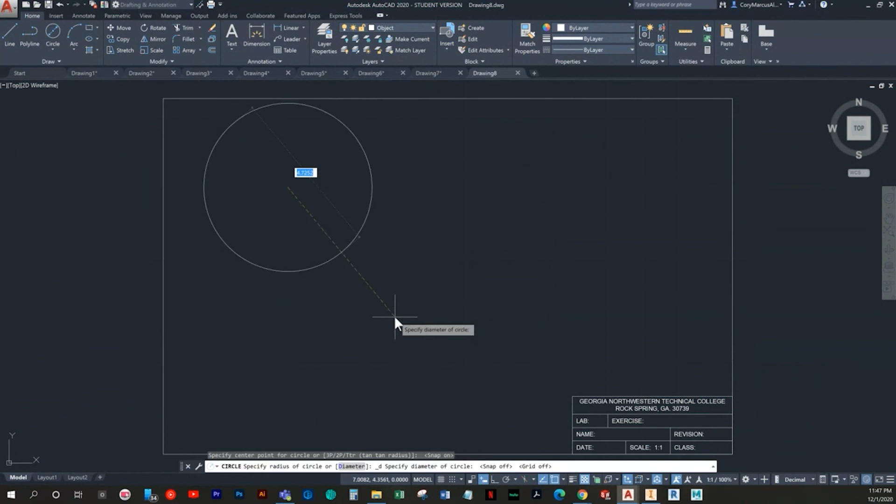So we'll draw it just like right up here somewhere. So a diameter of 1.5 for the small circle. And then from that center, it's over 1.25 to the center of the other circle, which is a diameter of 4.

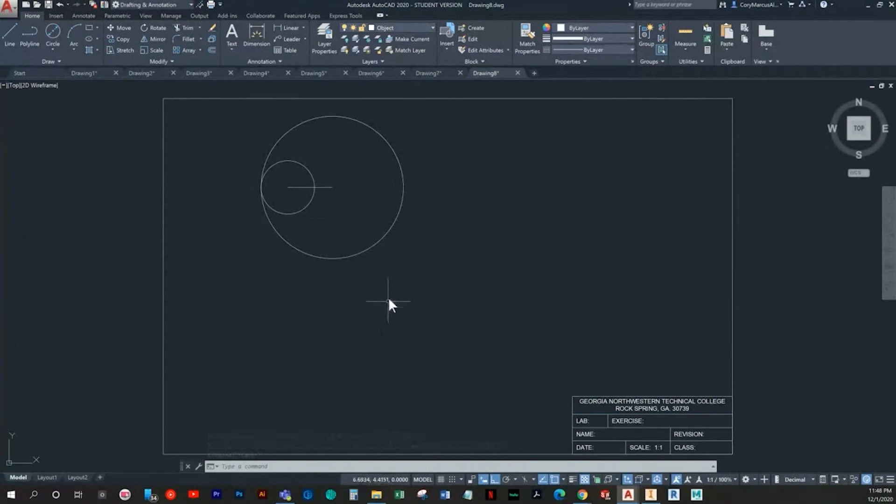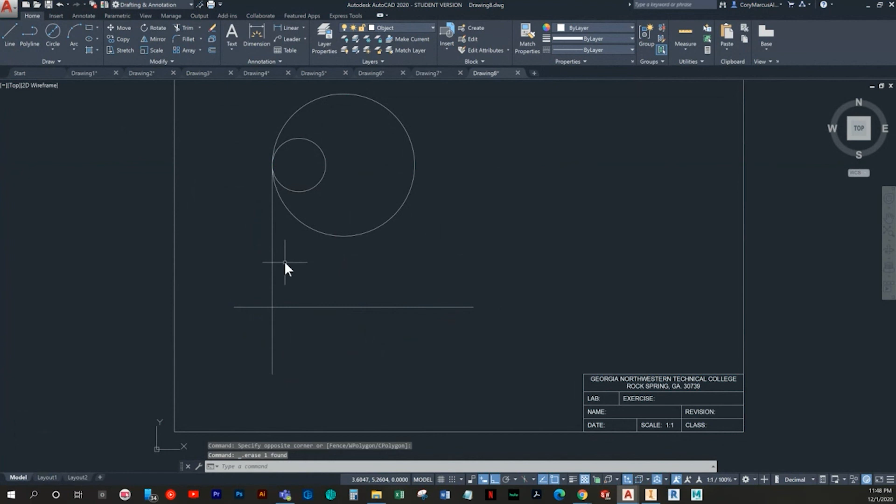So it turns out you basically have an eccentric shape, kind of like a reducer, but pretty basic. So from here, we can project that down. I'm just going to ballpark a position here. So that's 2 from the tangent. That's what we use as our basis.

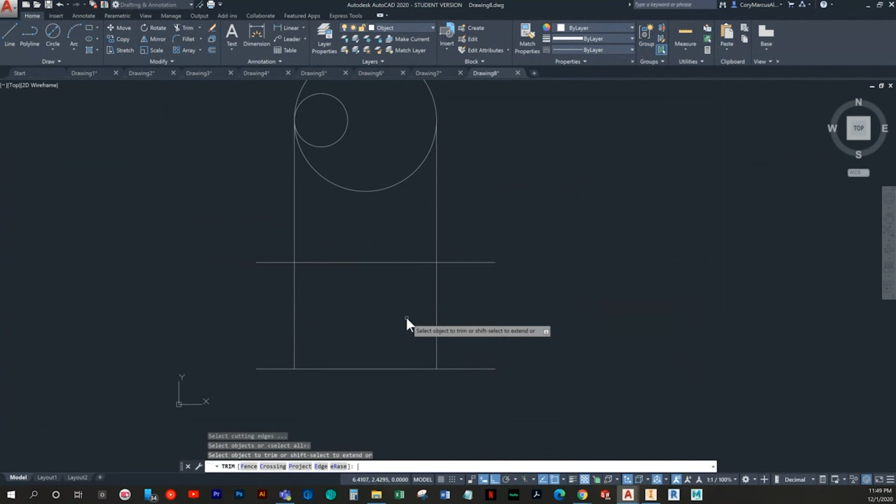Now this is going to be quite a big drawing, so I'm just going to clear out some space. And it's 3 overall height. So I'll use the extend command to get these lines further, and that's going to be our actual shape here.

Okay, so then we can draw our line down and simply connect the dots. And I guess actually we'll just delete that. You wouldn't think it would look quite like that, but it's actually what it looks like.

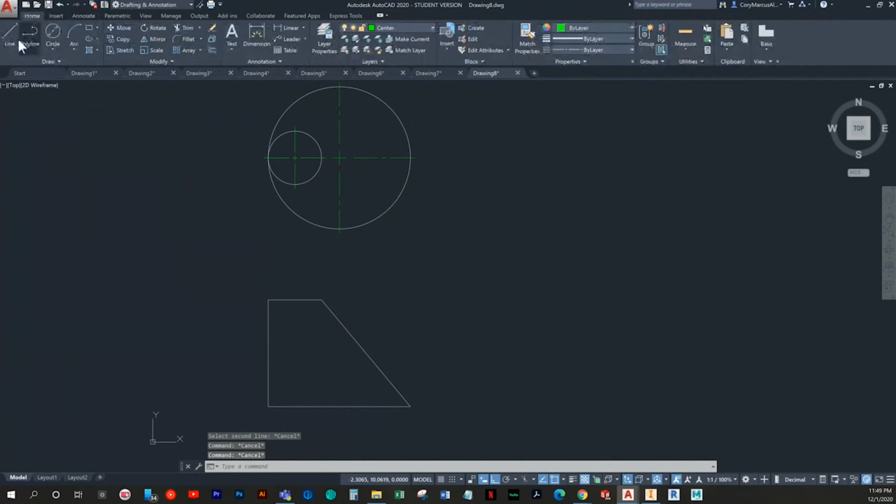So the one thing I would advise is, since it is in fact a circle, on top you should have your center mark, and then I would try to have a center line. I don't know if it'll let you do it with the vertex edge. So what I would do is temporarily draw a center line and just use it to make a center line here. But really, the problem is you have more or less a center line that kind of goes in this direction, but I don't know if it would let you do that.

Yeah, actually, okay, it would. So that's fine, but honestly, that just looks tacky. I would probably just leave it off. I don't think there's a good way to quantify a transition in shapes like that.

So anyhow, we'll do the side view, and we'll get it off this wrong layer after this last little projection edge here.

Now we can have a center mark in this other view, I believe, because we'll be drawing with an easier path. But anyway, it's 4 wide, and because these circles are in line, I can just draw from that center up 3, then 0.75 for half of that top, and I'll grab this portion and extend it 0.75 the other way.

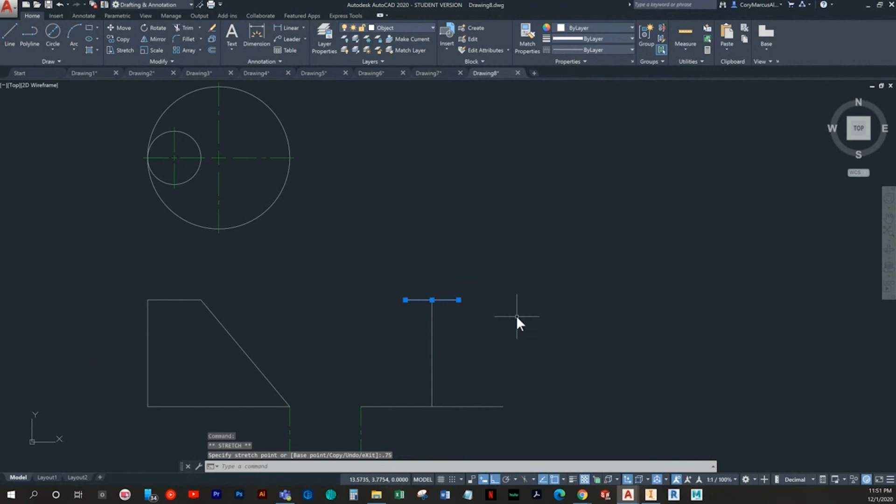So then I can just connect our edges.

And we'll go ahead and put in a center line. I don't know if it'll let you do 2 slants, but it did. Perfect. Okay, so that's actually it.